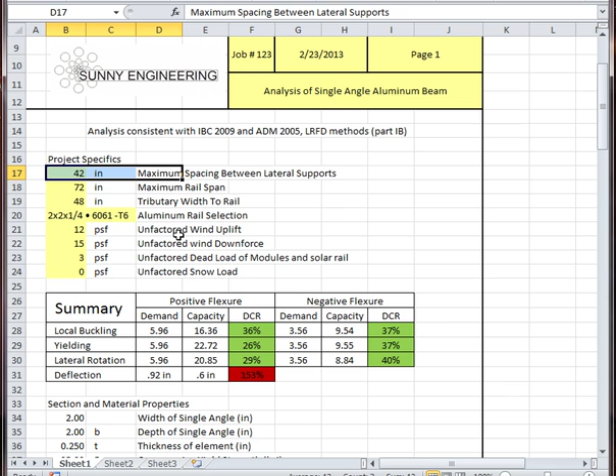And these are values that are going to change per job, so obviously that's going to be where the usefulness of this calculator is. I'm just going to explain each of these entries to help you in using this calculator. The first one is the maximum spacing between lateral supports. Now, if I scroll down, right here, this is the orientation of the aluminum rail. This calculator only works if the aluminum rail is oriented with one leg horizontal and one leg up. If the rail is inclined more than 10 degrees, then this calculator starts to become fairly inaccurate and will over-report the strength. So that's something that your engineer is going to have to be aware of. So this is just kind of what your angle iron is going to look like.

And mounting to the top of this, in this area, are going to be your solar rails, and they're going to keep your aluminum rail from shifting left and right. That's why they're called lateral supports, because they support it in the lateral dimension. So the maximum rail span, this is usually what you're trying to optimize. Now, if you look down here, we're failing in deflection. We've got 1 inch of deflection, which exceeds the deflection limit I'm using, L/120. Deflection limits in the solar industry are not yet really agreed upon, but this is a fairly reasonable deflection limit. In a 72-inch span, if you get an inch of deflection, that's not going to be the best.

So anyway, maybe we want to turn that down. Let's see if we can do 52 inches. Oh, yep, 52 inches works, no problem. The other thing that you could do if you really wanted some longer span is you could change this to a stronger rail. That reduces deflection some, but not enough. So maybe do 80 inches. There we go. That brings everything. What you're looking for is that all these things be less than 100%. And in this version of Excel, I've got it set up that if it's less than 100%, it's green. So green means go.

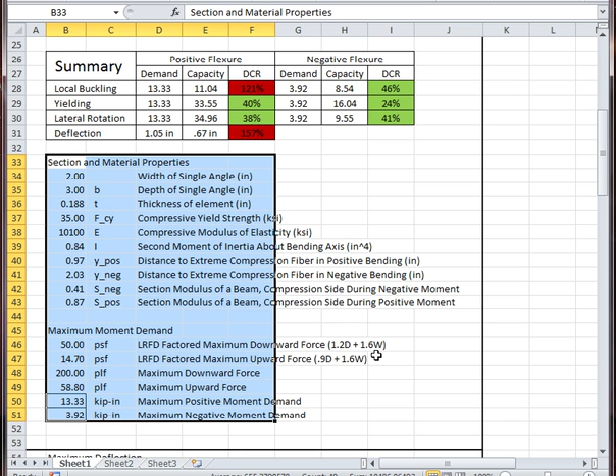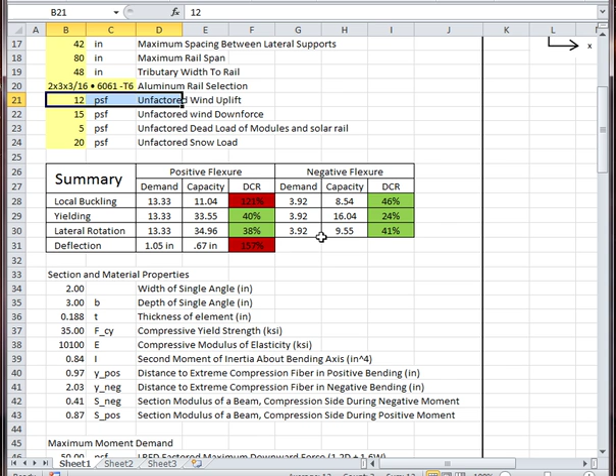When this goes to the building department or before the engineer stamps it, he's going to want to review these calculations and make sure that they're working. But generally, anything here that says positive flexure, that is the moment resulting from forces down, such as wind down or dead load or snow load. Those are going to increase your positive moment, and the negative moment is going to be mostly due to the wind uplift. And if any of that is Greek, well, that's fine. If these values are entered correctly, then you're going to get a good idea of what your engineers have to accept from what comes here.

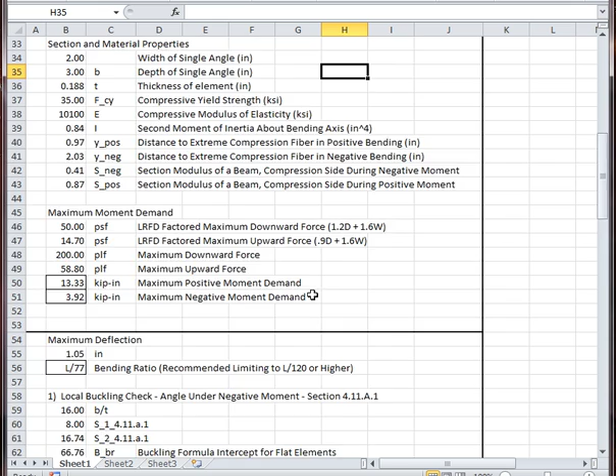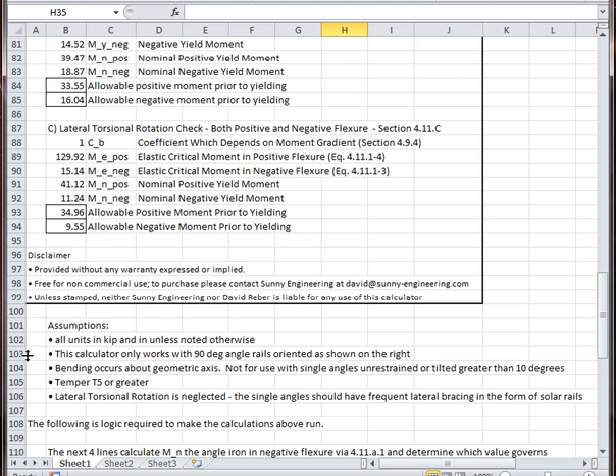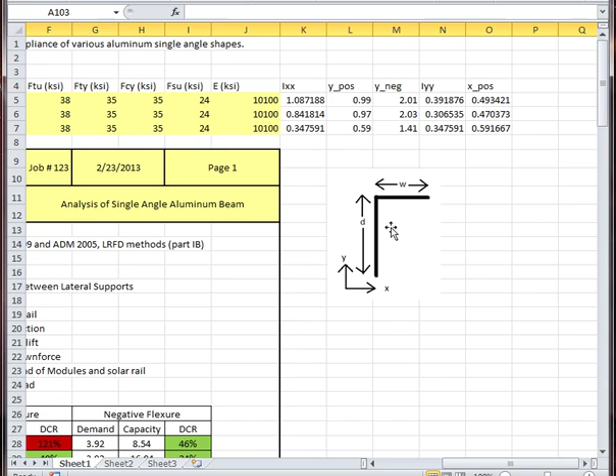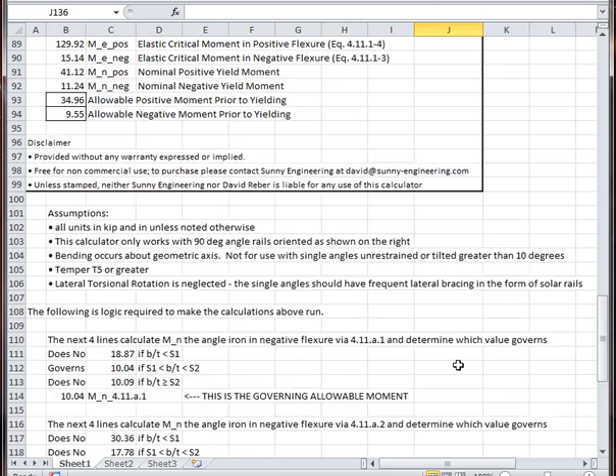And I've listed the assumptions that this calculator works under here. I guess the units isn't really an assumption, but you should only use 90-degree angles with the orientation like this, with one leg horizontal and one leg up, closer to the sky. And I've assumed that bending occurs about the geometric axis, which is why this calculator is not going to work when you have inclinations on your rail greater than 10 degrees. As I mentioned, T5 or greater. Don't really need to worry about that. And then all this stuff here is just logic that is helping to run the equations above. So I hope you find this calculator useful.